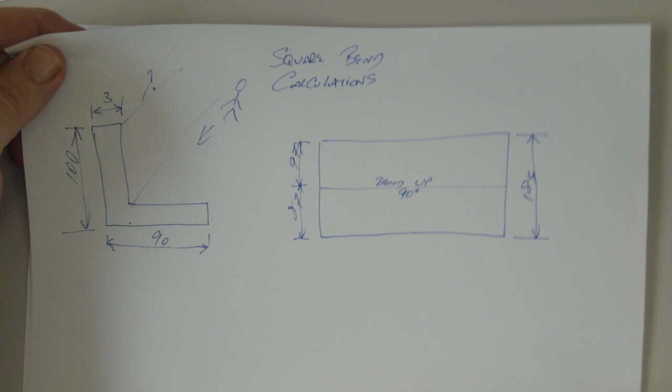We actually, in the first exercise, we saw this where we worked to the outside, and then we had an outside measurement. We went to the inside to obtain our inside measurements. We had a distance back, but that's irrelevant, we don't need to worry about that. That distance could vary, could change how long the item is, it doesn't really matter. So let's look at another one.

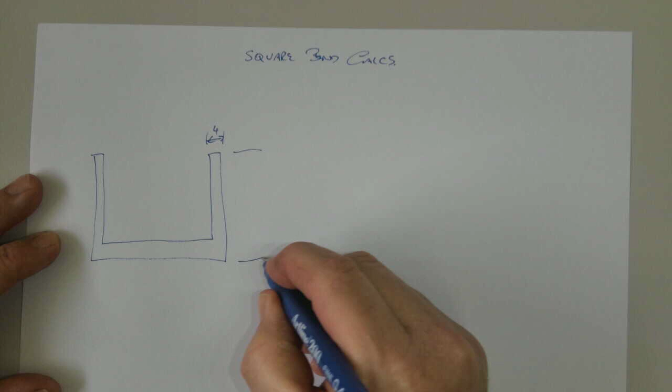Let's take it up a step. Let's produce another sketch, this time with a shape that looks similar. And let's say this time we're working with a thickness of 4mm plate. This leg will be, and of course everything's out of proportion, it's not to scale, so just go with the numbers, don't worry about it. So I'm just going to make some measurements up here, and we'll call that 96, this one 188.

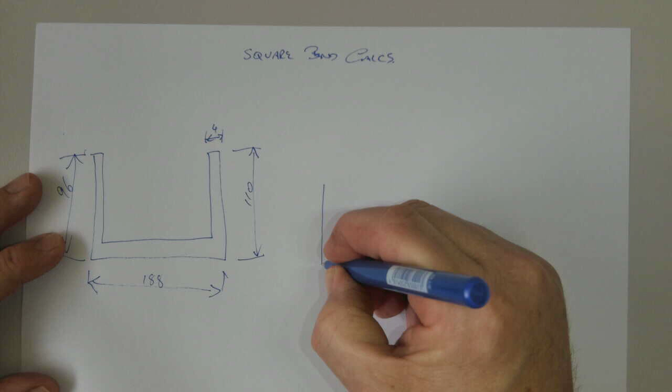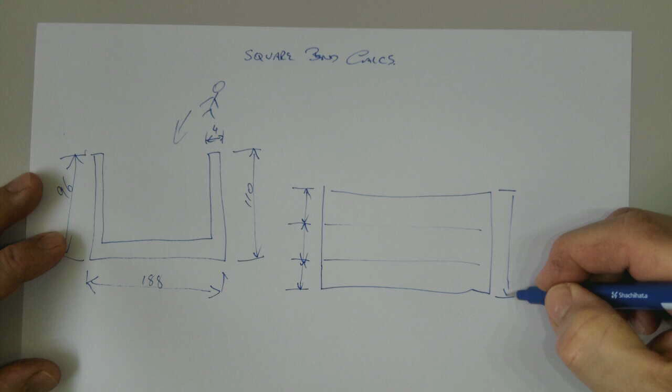Right, we need to produce our production sketch again, which we're going to do over here. We've got two bend lines in this one. Again, we're standing at the top and we've got a bird's eye view, looking down. So what we see is our dimensions are required for each bend and an overall distance. And again, this length is irrelevant, doesn't really matter. We don't know how long it is, and that's not what we're looking for.

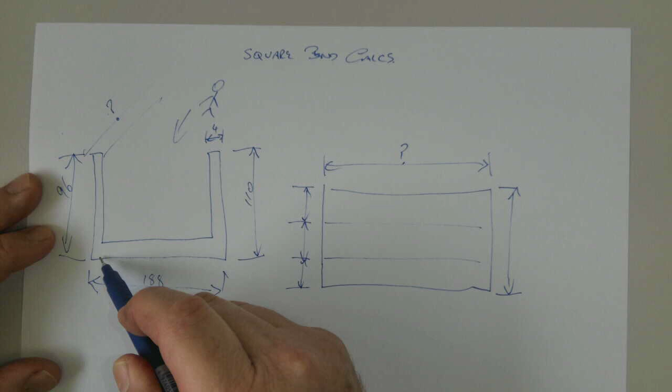So we established last time that we work to the inside. We're given outside measurements, but we work to the inside. So we can see here, this is 4mm thick now, so from there to there is 4mm. We take 4mm off the 96, becomes 92.

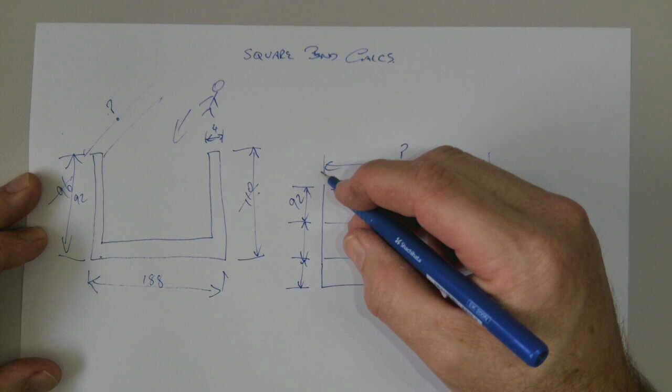Work to the other end down this side now, which is over here, 110mm. Take away 4mm, that'll become 106 now. So we'll make that 92. This one, 110, sorry, that'll make that a 106, won't it? Sorry, 106, 106.

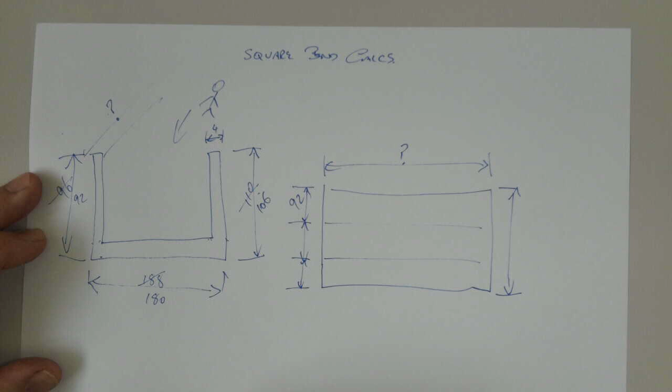And then the 188. Now we've got this one, we've got 4mm here, 4mm here, so that's a total of 8mm we have to take off. Alright, so 180, that will be 180. So 92 on one side, 106 on this side, and then 180 in the middle.

And if we added that up, we have our 180 plus our 106 plus our 92 equals 378, so 378.

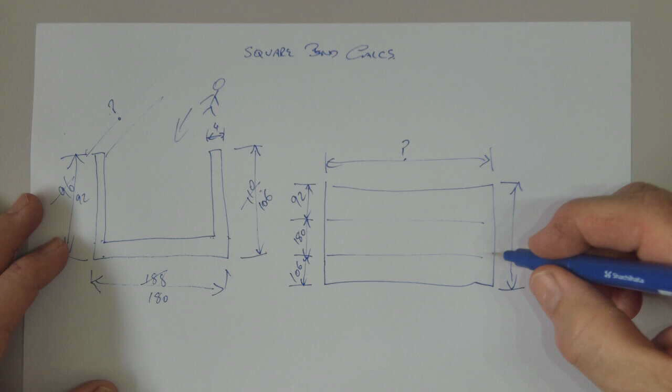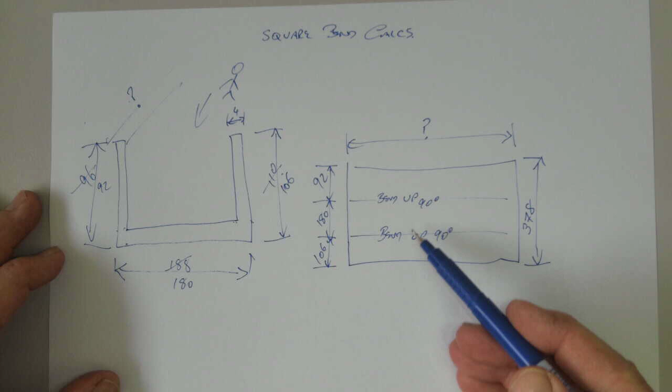And don't forget, so there's the size of the plate we need. Don't forget that we have to put in here to identify the fact it's a bend up at 90 degrees, and bend up at 90 degrees. So always, when you produce your production sketch, make sure you put in your bend up or bend down or whatever it is, because you may get other angles that then run in a direction like this. We have to identify a bend up or a bend down. Okay, that was number 2 for bend calcs.